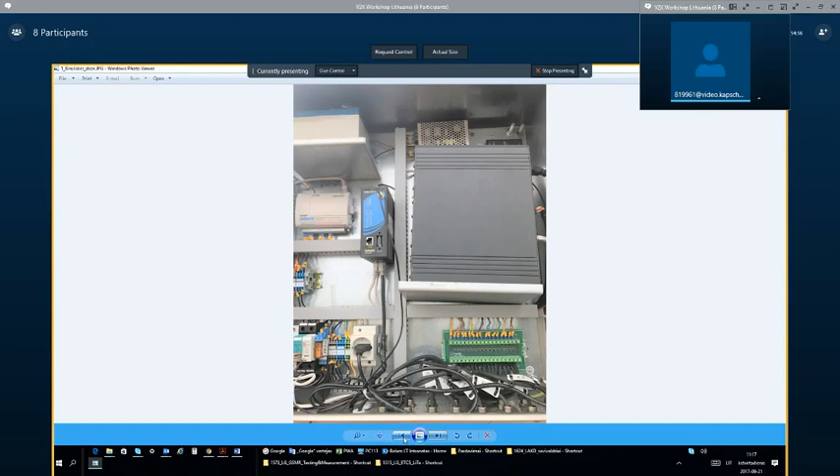Is it higher than 5 meters? The pole? Sorry, not. Okay, I can see. It's okay, I think it's 4 meters.

Rimvydas, what is the height of that pole? You measure it. One moment. 6 meters 20 centimeters. 620. Great, okay, sounds not so bad.

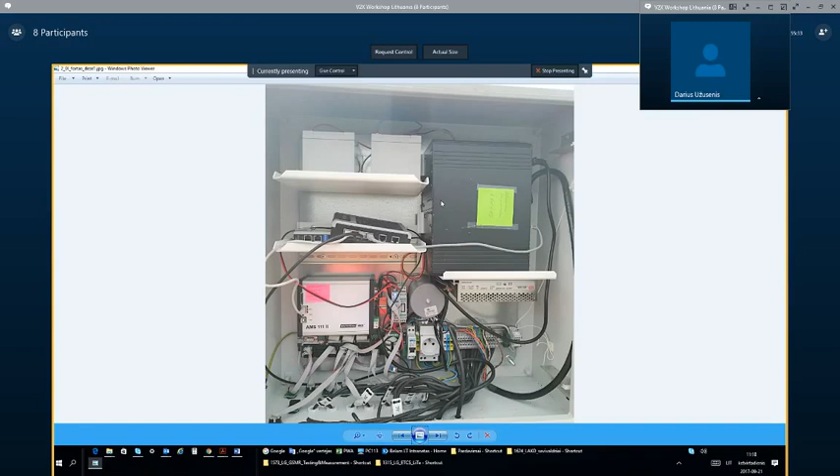Okay, so the next one, Fortas, second side. Okay, not a very nice installation, but... no? This is 6 meters 50 on top. My first impression when I see it is that it's a little bit crowded on the top.

I guess there are cameras on it, or camera sensors, weather sensors? It just has to be ensured that we're not disturbing anything else, because we sent you also the size of the unit, so that it's not blocking the view from another sensor or camera. But in general, it looks not so bad.

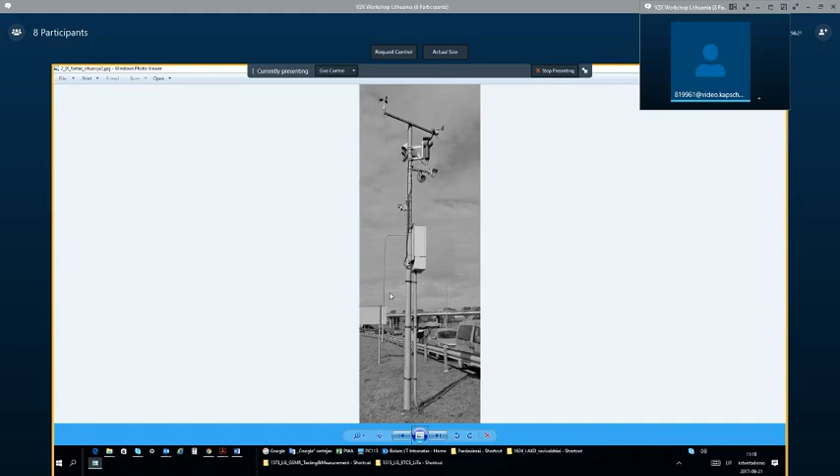Okay, and number 3, generator, the smaller one. It's a pole for lights. You see, it's the same. It's about, I don't know, maybe 10 meters.

So we have police cameras here and traffic cameras here and our boxes here. Police cameras, 5 meters 50. Okay, so we can put it here, I think.

And it seems that the diameter of the pole is decreasing with the height, or? Yes, it's increasing. Okay, what is inside?

And number 4, battery, last one. What is inside, like spaghetti? Yeah, I don't know, it's not our job, but we don't like that. But okay, like 6 meters 50 from here.

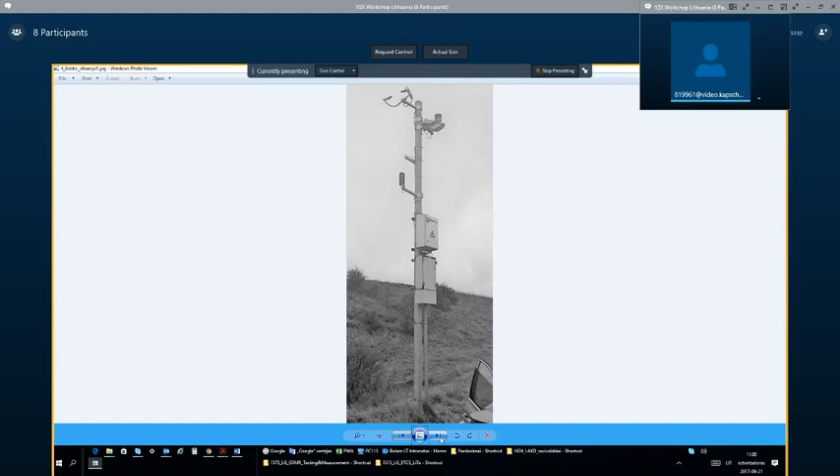So we have to find our space on the pole and on the cabinets. As from your site survey document, I saw that we need to have an offset of 1 meter, and after that put the radio equipment. That's right? Correct. So we have this mounting bracket, and on this mounting bracket the roadside unit RIS-9160 will be installed.

Yeah, correct. And the antenna is installed separately? No, the antenna is directly connected to the roadside unit. But then it's not 1 meter? Or is our mounting bracket 1 meter offset?

I have to check how long it is, but since we are on a pole, I don't see big problems. This 1 meter distance from the antennas to other parts is mainly for gantries, because there are a lot more metallic parts, you have horizontal poles there. The whole gantry is much more massive than such single poles you're showing now, where you want to install it. So I don't see a big problem with the space between the antenna and the poles. This could be fine.

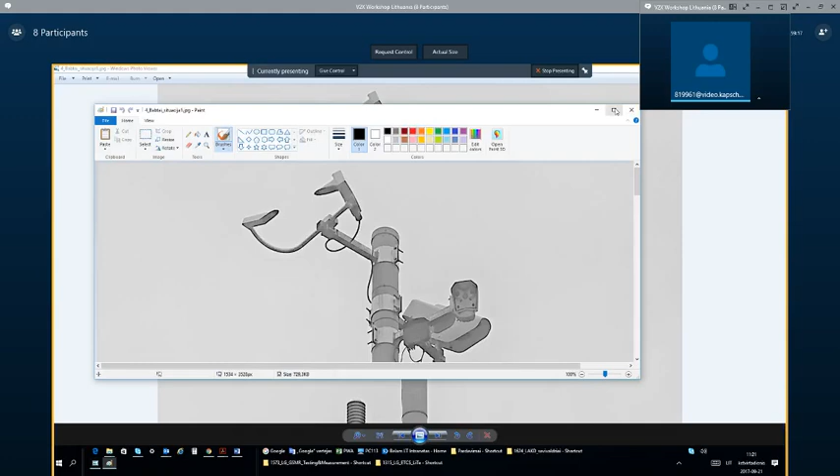Do you also have maybe a picture of the road? Is it a highway, is it a rural road, or?

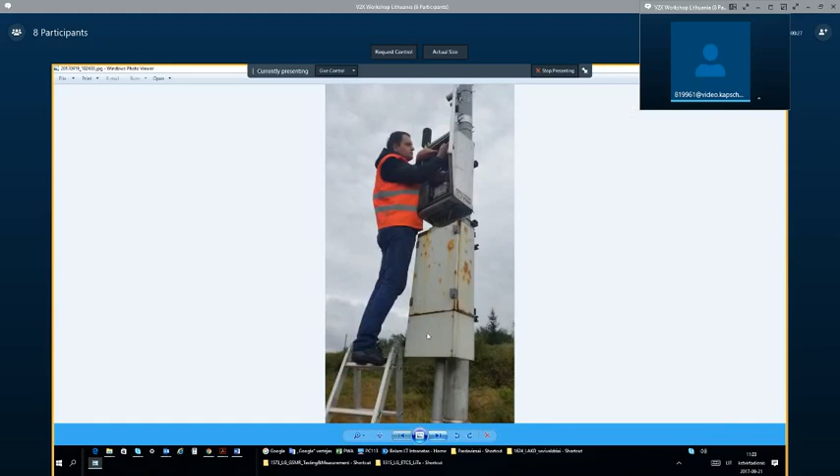So I believe we should look at it from a Google Maps view, from a top view, to get a better understanding of how the situation works. Basically, if the vehicles, if it's not an on-ramp and exit ramp, we should be able to distinguish between the travel directions, because as long as the vehicles are traveling in a straight line, it should be okay. But honestly, there will not be too many vehicles right now, it will mostly be our own equipped vehicles.

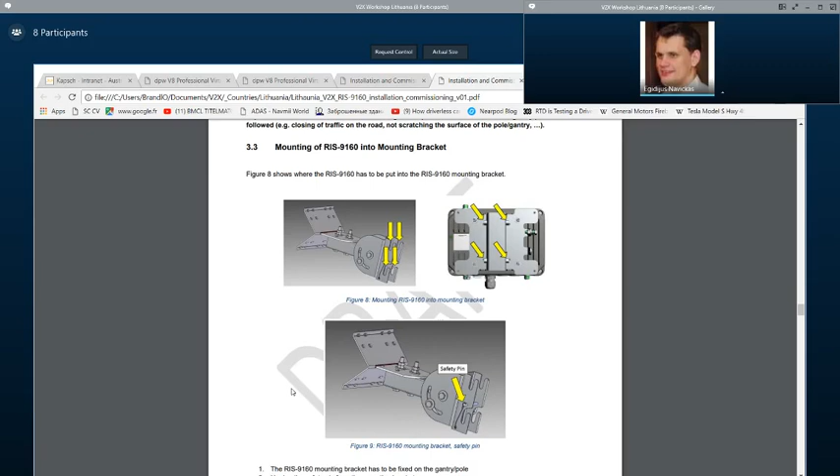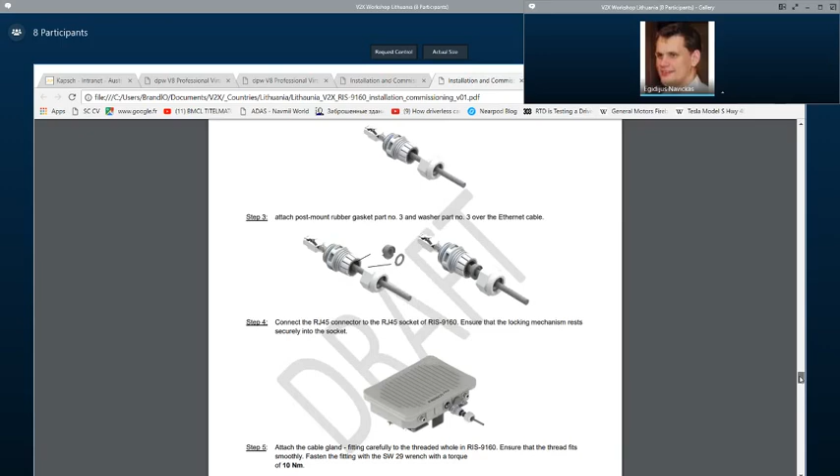Okay, let's check this document. Yes, it's around 15 pages, maybe 50 pages. Okay, yeah. Yes, on page 15 you can see the RJ45 connector, yeah? Okay, great.

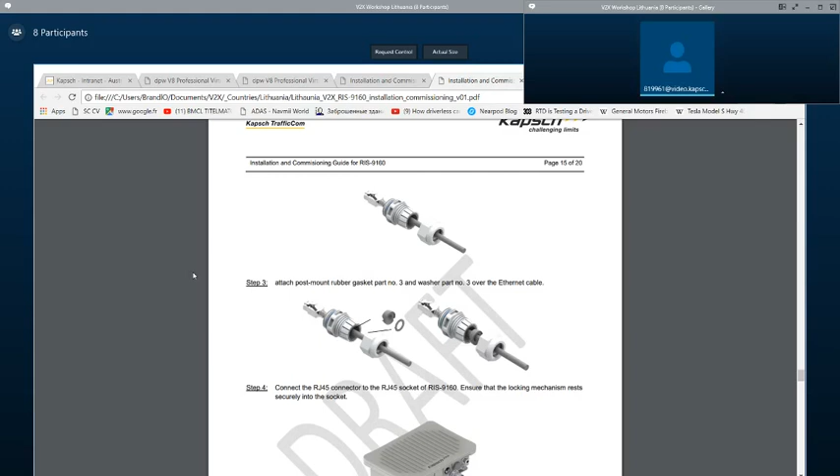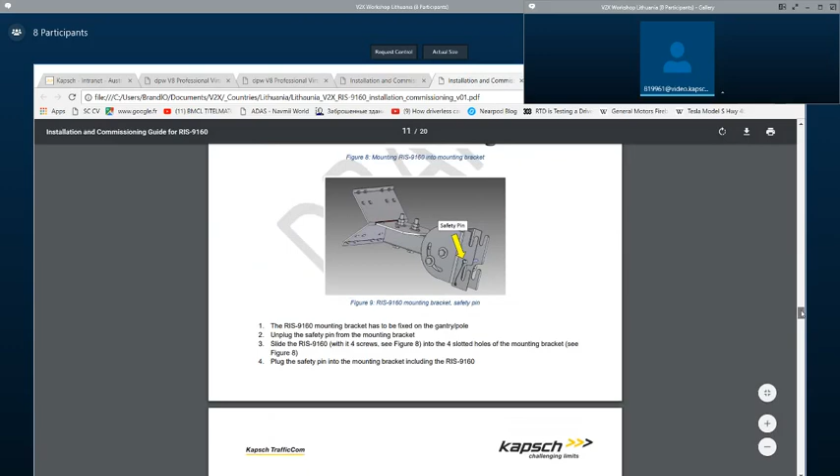Okay, regarding the mounting bracket, just to understand you correctly, your proposal is that you produce the whole bracket by yourself? Not ourselves, we are not metallic workers. But you will solve it.

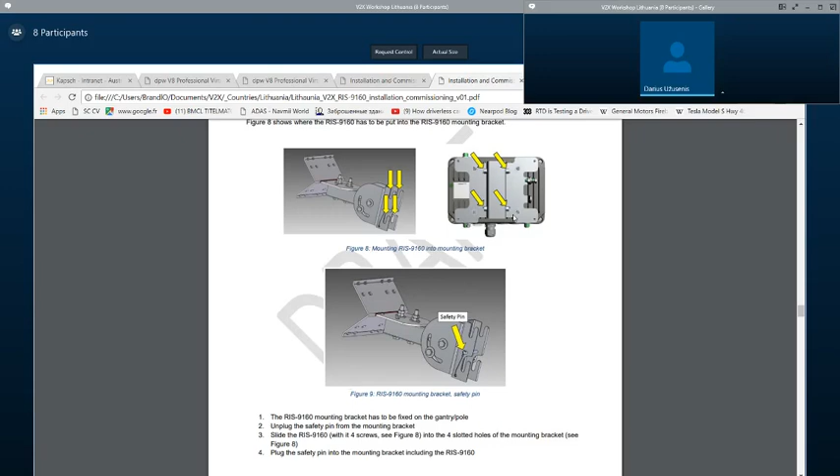Yeah, but they have experience in Lithuanian Railways. They did some gauge profiling for railways to scan, and they put the brackets there, ordering or manufacturing locally the brackets for lasers. Everybody should be safe, stable, and anti-corrosion with some mechanical things. So somehow they have experience, it's working maybe 3-4 years with no big issues.

Okay, so yesterday you were asking for the distance between the bolts. So you were referring to this distance between those bolts. Yes, in yellow.

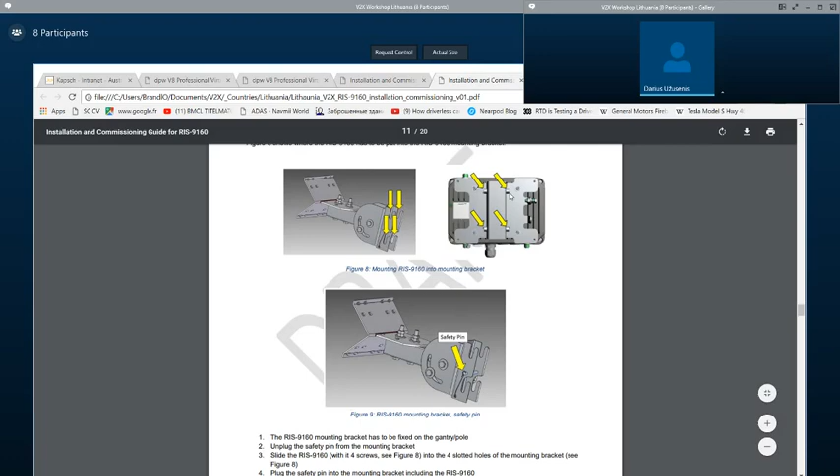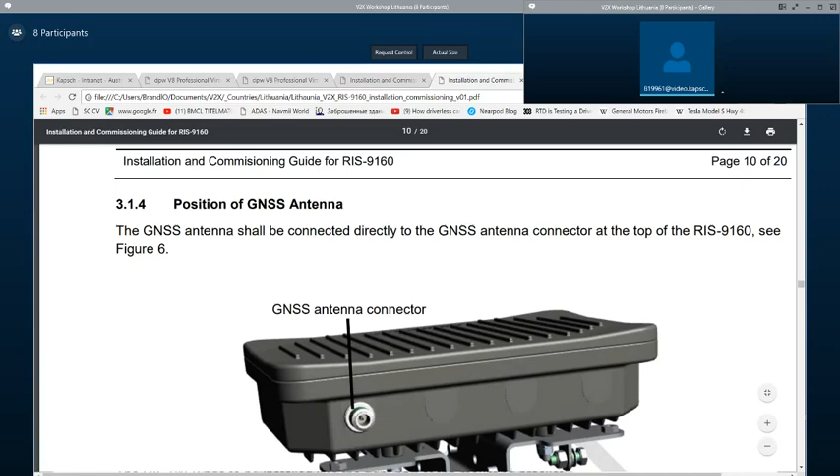Let me give you a short explanation about how to install it, so that we have the same understanding before we go further with the discussion. Let me check if... yeah, no, I will go down since the pictures were just fine. So the whole mounting parts consist of two pieces.

We have the so-called mounting plate, which is directly mounted on the roadside unit, with 4 screws. This mounting plate has 4 screws there - this is where these yellow arrows are pointing to.

Then the second part is the so-called mounting bracket. This is the part which is directly installed on the pole. This bracket has a V shape, and is directly mounted with metal straps on the pole. During installation of the roadside unit, you don't need any further tools - you just slide the roadside unit directly into the mounting bracket and fix it with the safety pin, which is on a metallic wire there. So this is how it works.

We also have other possibilities, but if you're talking about producing or buying a mounting bracket somewhere, the first possibility would be that the part of the mounting bracket where these long holes are, where these yellow arrows are pointing on the left picture, you mount this somehow on the pole, and then you would have the same possibility to slide the roadside unit directly in there. So the left part of this bracket can be produced or bought by you or the customer. Is this a possibility for you?

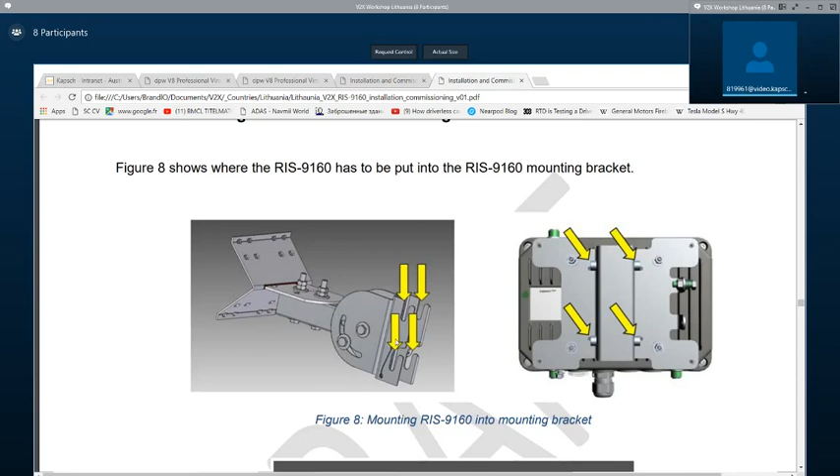That's why we were delivering you this installation manual last week, and it's a draft. So the vertical installation is not included here, but we have the possibility that the same V-bracket, as it is on this picture, is also available for a vertical one.

Do you have more details about that metallic part? We have, yes. We can deliver you technical schematic drawings of it.

So if we can provide a fitting bracket for vertical installation, would you prefer to use our bracket, or would you prefer to do it yourselves? I think, Egidius, what do you think? I think as easy, if it's working well, so let's use Kapsch bracket. I believe it reduces the risk of any delays. So if we provide it, it should be fine.

Alex is laughing, let's see. No, we have huge experience with those brackets because we use thousands of them for mounting tolling equipment, so this should be easy for us. But we should decide soon on how we want to proceed.

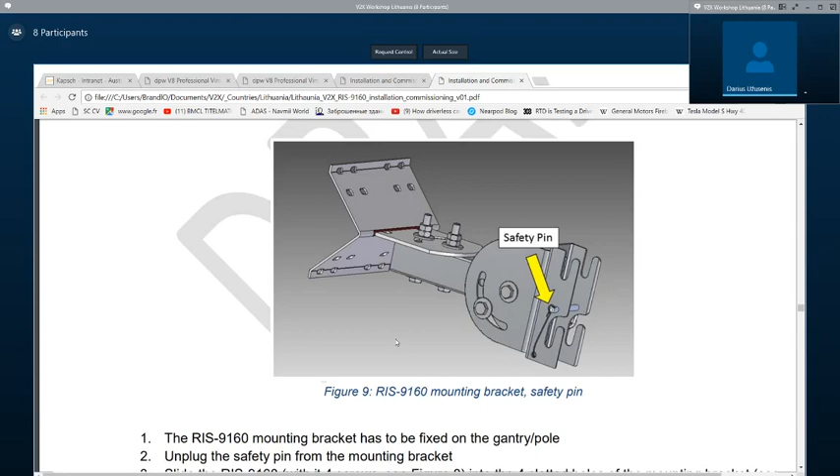And I think Balam, as project manager - the company who works together with Kapsch on that project - we would also like to participate in the communication between you, Kapsch, Balam, and the integrator company and customer, to understand how it's working, the project risk, timeline, etc.

This is Wolfgang speaking. One question: this third party who has to provide the interface between the roadside unit and EIS, are they also responsible to integrate the other sections with the competitive products? Is this the same company who has to do it? Yes? Okay, so then they will be very busy integrating all of this. I don't envy them their job. That will not be fun.

Did you receive any information about the other companies involved? No, because this would be very interesting. Honestly, I believe there will have to be some joint integration between those, because they cannot build three different interfaces toward the traffic management center. It's a nice idea, but we don't believe this is possible or that it makes any sense for the customer.

So we expect some serious discussion very soon with the customer. Our question would be if you could really push the customer for more information, for their picture on how they want to do it, and get information from the company who won this contract. We need more information and we need to start the discussion with them.

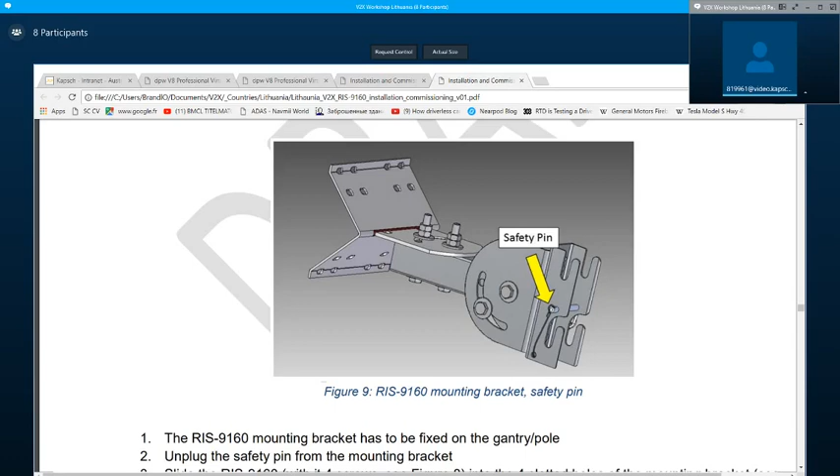I will be your camera guy, carrying around the laptop and trying to create an impression for you remotely. It will be a bit difficult, but we will do our best. I think it should be fine. Camera guy, just a second, we will turn on the camera again.

Just want to see what we see here. Why can't I see myself? No, something is wrong here. Can you see our video? No, where did you hear? Black screen, that's interesting.

I don't know, perhaps we have to use yours. Actually, we could do that. Yeah, we should do that. It's okay. But good, it's time to move forward with this call before everything breaks down.

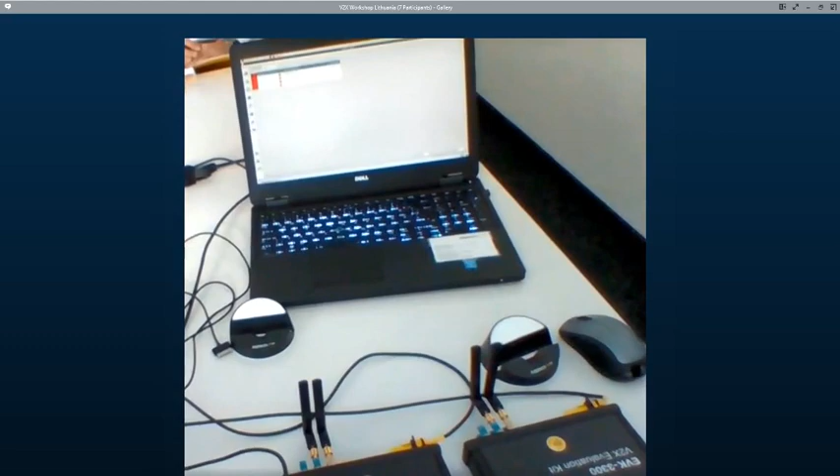The range between those two vehicles is roughly 300 meters, so vehicles have a lower range than the roadside unit. And of course, if the roadside unit is close by, like it is today, in this case, because we have it next to the vehicles, the roadside unit would receive all those messages. The roadside unit is just like the roadside unit in Lithuania will be. It is connected via Ethernet to the traffic management center, and the traffic management center will receive those messages. Then the traffic management operator will decide on how to proceed with those messages. He can decide to ignore them, but he can also decide to send the messages back to the vehicle.

Could you do this with one of the use cases? Yes, so Barbara will now take one of the incidents, slippery road event, and start to manage it. Can you manage the event from here? Yes, you can right click it and manage it. Okay.

Let's just close this one. Okay, this one. Yes, so now the operator, and it's difficult to see for you, now the operator opened the message that we received from the vehicle. And the interesting thing is that we take all the information from the vehicle message and transfer it to the traffic management system. We know it's a weather advisory, we know about the location, we know it's about ice on the road. So we took all the information from the vehicle message, and it's in the workflow of the traffic management system.

Now the operator decides to send this warning to all other road users. We'll now create the warning, and it is now being sent to all other vehicles in the area. So from now on, slippery road, all other vehicles will receive the same message sent from the traffic management center. So we have three ways of communication: vehicle-to-vehicle, vehicle to infrastructure, and infrastructure to vehicle. These are the three ways of communication today.